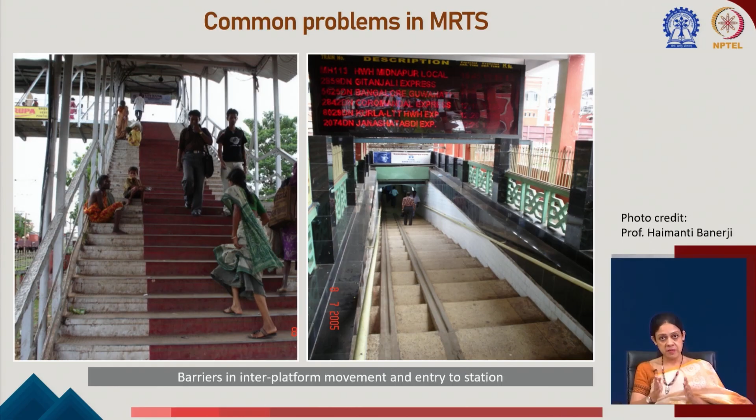These overbridges, foot overbridges and subways are the age-old solutions to the problem of transfer from road to station or from one platform to another, but they are barriers for persons with disabilities and the elderly. So this is one problem. What else?

Next, when you have reached the platform, there is the gap between the platform and the train. There is a vertical gap and a horizontal gap. Unfortunately, our trains are not standard, our coaches are not standard. So even if someone says they will increase the height of the platform, what do you do about the horizontal gap?

Thankfully, when you go for the metros, that problem is less, because everything is standardized there. But our trains are not standardized - our local trains and long distance trains have different dimensions. So the problem is everywhere, it is really a complex problem. Just as our buses are not standard and our bus stops are not standard, similarly our railway stations and trains are also not standardized. That's really a problem, the gap between the train and the platform.

And of course there are facilities like inaccessible toilets. Here it is probably easier to handle, because now we have building design standards and harmonized guidelines, and you can modify them provided there is space. Only the awareness needs to be there. Inaccessible drinking water - these can be handled, but let us first understand the problems.

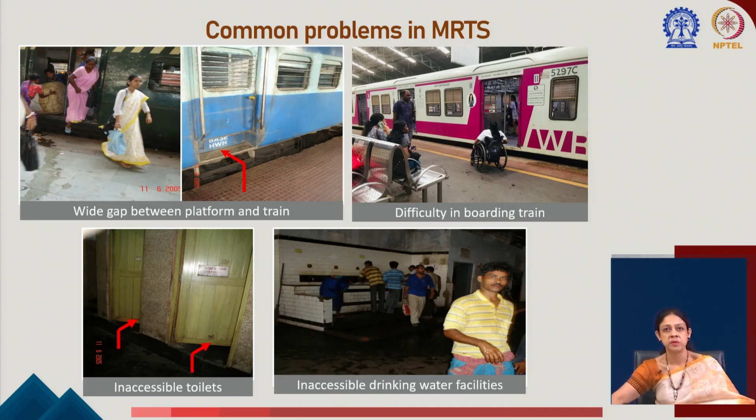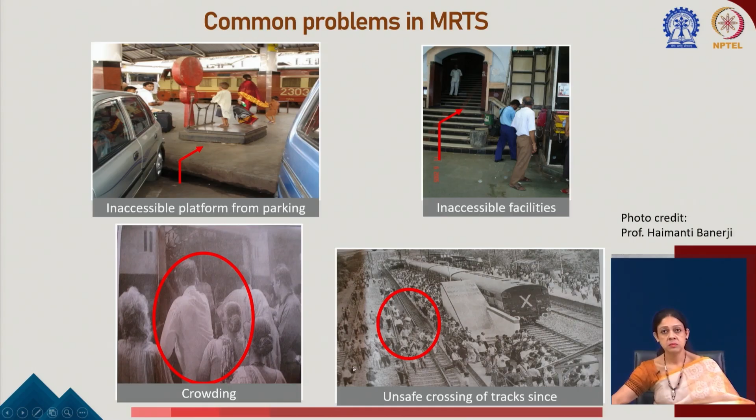Other problems include psychological problems like crowding, unsafe crossing of tracks, and long underpasses for inter-platform movement or for modal changes.

We were talking about modal changes. Generally, when you are transferring from a bus or taxi to the station, many times you need to move through these underpasses, and these are most of the time long stretches without any intermediate seating facilities and with inadequate illumination. So even though there are no level differences, the barriers are still there. These need to be understood.

Inadequate seating facility, crowding is always there in the platform everywhere, and inadequate information in various zones. Someone sitting or waiting in the platform doesn't know when the trains will be announced, and that creates tension.

We talked about psychological barriers in our initial classes. So these are psychological barriers - you do not know where your train will be, whether on this platform or whether you have to walk another 10 minutes to reach it. That creates panic, and because of this uncertainty, people tend to avoid the public transportation system. These are psychological barriers.

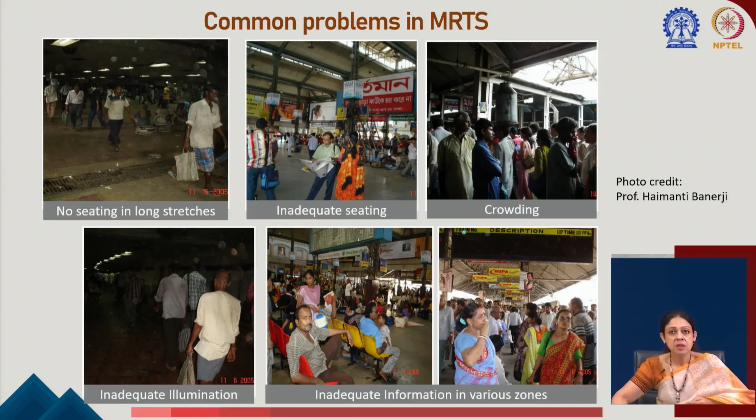So what we need to do - the key elements of architectural vision in the station - we need to maximize passenger convenience by giving them seating and illumination, which would lead to safety and security, because these long underpasses, particularly in odd hours, might be unsafe, and vulnerable people are often easy prey to criminal activities. At the same time, we need fast and efficient passenger flow, flexible interiors with proper seating facilities and vision, and of course a world class icon.

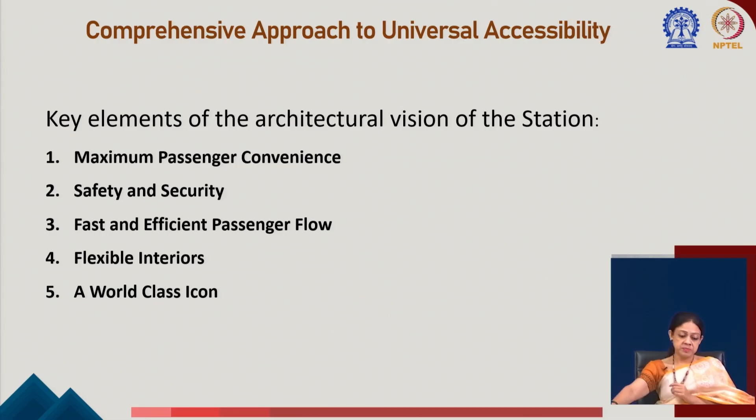So, the design principles, I think, are coming from what we discussed. I will just skip this slide and move on.

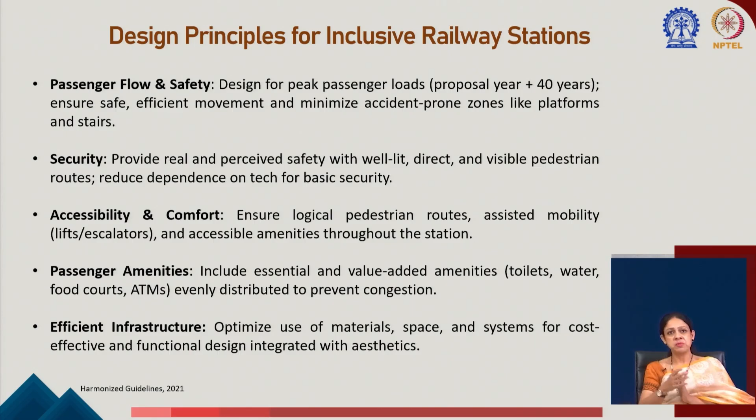Now let us see what components we have. First, when we access the station, that is the parking and vehicular access. There has to be at least one accessible entrance at every intermodal street and access point. We discussed making a facility universally accessible, barrier free and visitable, so this is talking about visitability, that it is at least visitable by everyone. One accessible entry must be there with proper information indicating which is the accessible entry.

And say when there is a transfer from a bus stop to the station, you should be able to know that exit number 5 leads through the accessible entry to the station. No confusion.

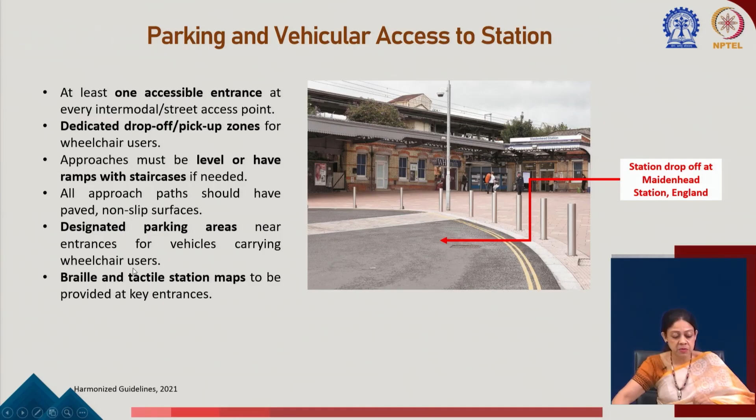Next is the approach route for stations. Definitely level difference is the basic requirement, but other than that, non-slip surface. When we were talking about where the gap lies, we said that sometimes faulty choice of material or inappropriate material procured leads to total failure of a good design. So the surface needs to be non-slip with proper material procured. TGSI, needless to say, and proper width with level ramps. A good example is ramped access to the platforms with TGSI.

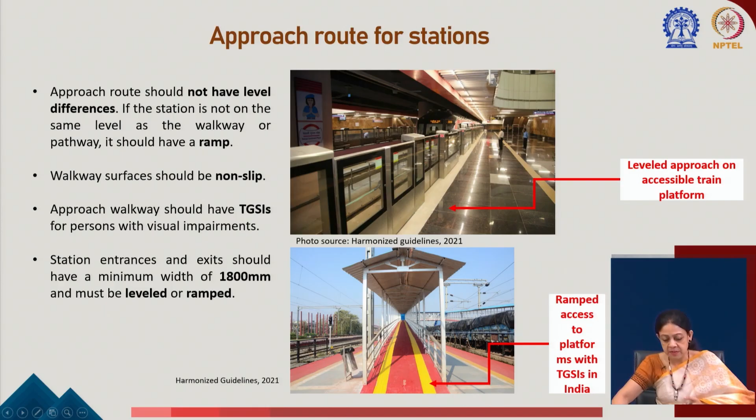Elevators and escalators. At least one accessible elevator with guiding blocks, proper grab bars, tactile braille floor indicators. So every component of an elevator should be there.

Now escalators, as I said earlier, though they are not universally accessible, are useful for mass movement. Escalators are important for semi-mobile persons, like a person with maybe heart disease who cannot take steps but can easily get into the escalator and secure themselves, or a person with heavy luggage, or someone simply tired at the end of the day, can use escalators. So escalators are important for mass movement in public transportation, though they cannot be the only solution. I repeat, they cannot be the only solution. There has to be a proper elevator also complying with the basic accessibility standards.

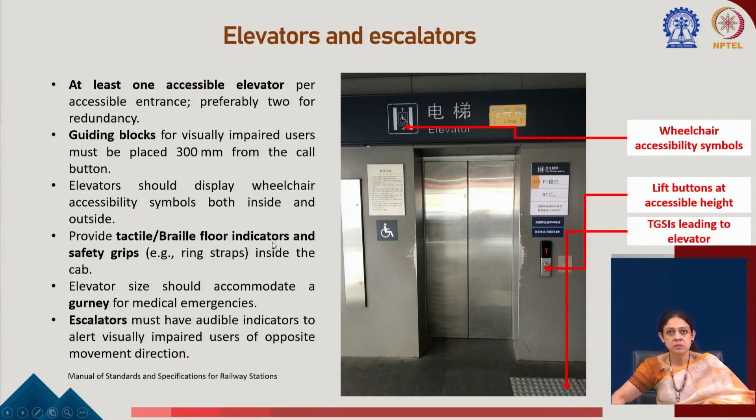Now, once you get into the station, or before you get into the station, you need to purchase tickets. As we discussed for hotel receptions, you need a low height counter. Similarly here, there has to be at least one low height counter with proper knee clearance, because you might need to go in front and access the table and fill in a form.

And also pictographic service maps for easy understanding of important signage. Induction loop unit for hearing impaired users at one counter has to be mandatorily installed there.

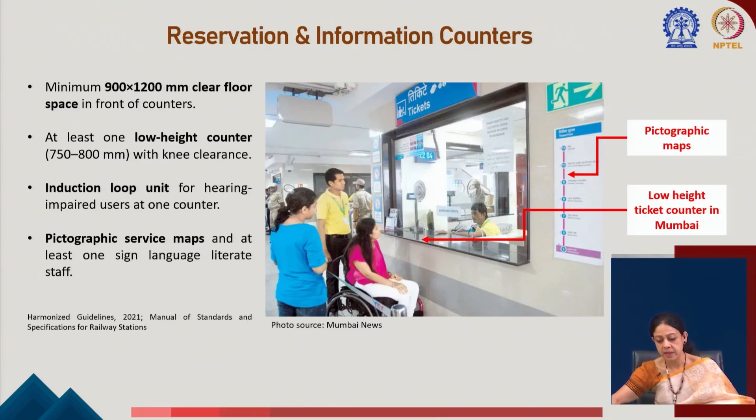So these all reference the harmonized guideline again. As you can see, the pictographic map and the low height counter. This is an ideal design of the reservation and information counters, where you have tactile warning tiles, Divyang friendly booths, and you can see the heights and clear space. So everything is being displayed here. I hope this is clear.

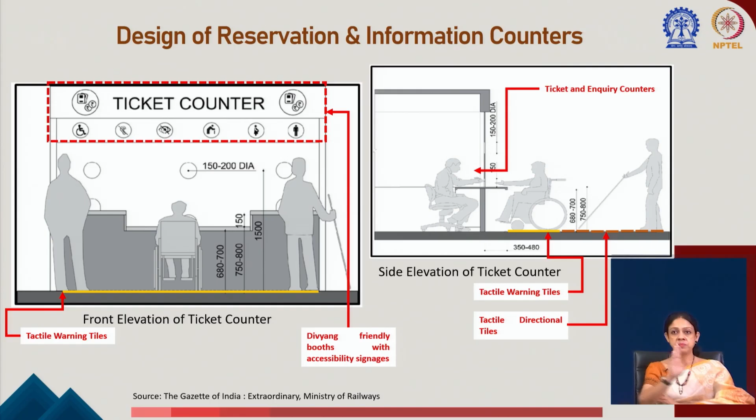Now facilities, for wheelchair and other assistive devices like crutches. That means if someone is not coming on a wheelchair but requires a transfer from the car to the platform or vehicle, a folded wheelchair or space to store wheelchairs, and if required, wheelchairs are to be provided at every station for helping them. First aid kits and other things, and of course the directional tile and the hazardous or stop tiles, warning tiles.

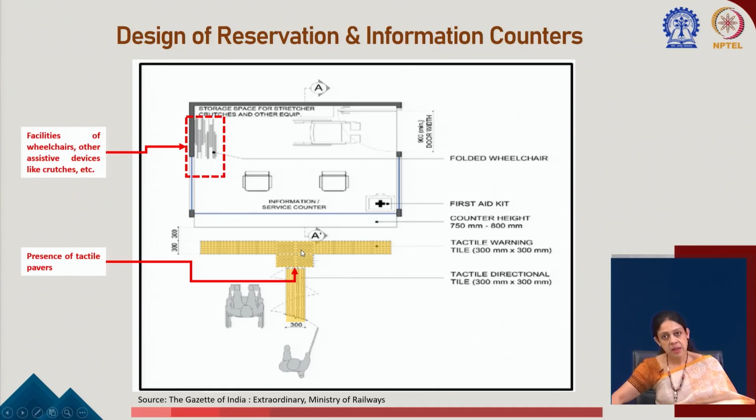Now these are some basic elements which you will find everywhere in every building. Here we see warning blocks at 600 millimeter before the track edge, non-slip level flooring, proper illumination of the platform, no gap or direct transfer, and accessible connection between the platform via lifts and all.

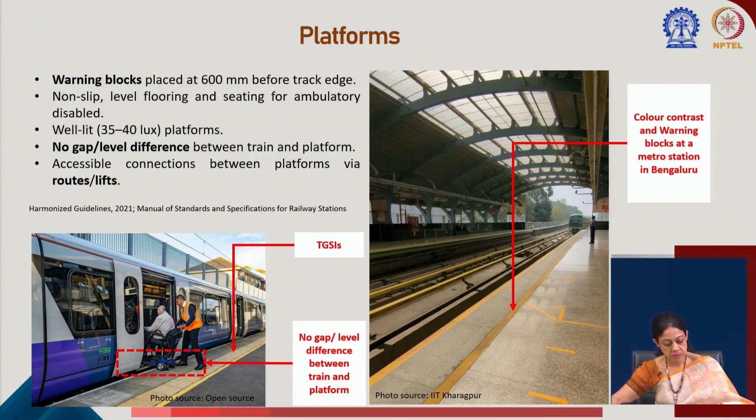Now this is important. All structural elements like columns or coach position indicator poles, etc., shall be painted in contrast color from the bottom to 900 millimeter. Why? Because these are for people with low vision or advanced cataract, or for elderly who might be unmindful. So this is a safety measure which prevents people from unmindfully hitting them.

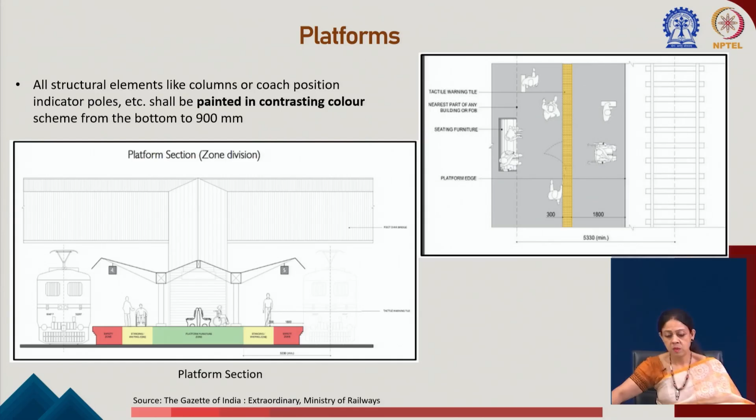Now, coming to the inside, that is the coach design and sitting facilities. First of all, entry wide doors with proper gap. If required, hydraulic lift or ramp at one door if there is a huge mismatch exist. Now, within the coach, a well demarcated wheelchair space.

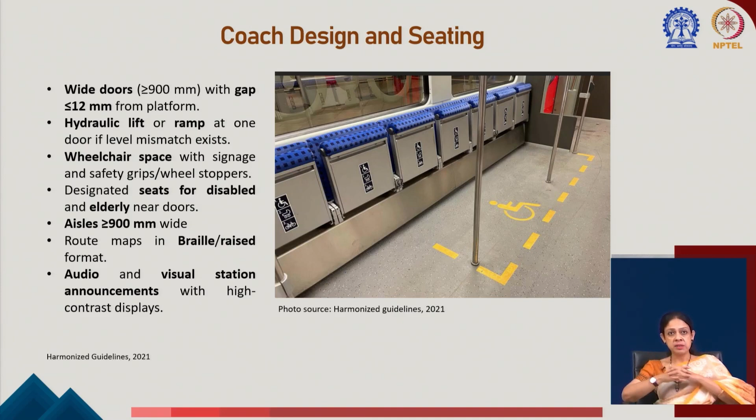Designated seats for disabled, proper aisle width, the route maps in braille or raised format. So, these are essential for the design of the coaches inside.

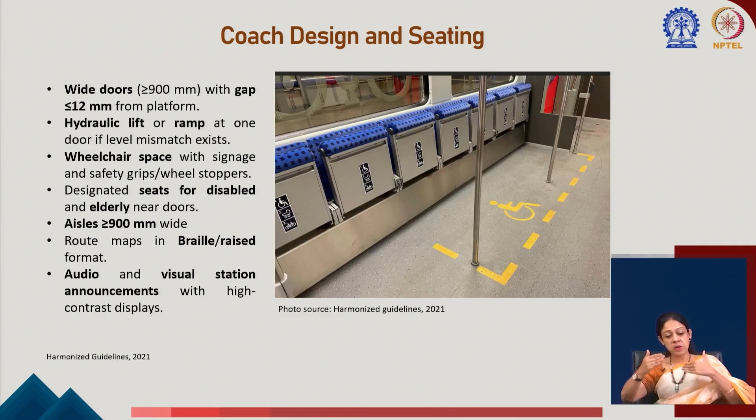Now, what are the facilities at the station? Toilets are there definitely, and a toilet will follow the normal accessibility standards, like wheelchair turning radius, grab bars and all. The drinking water points, their height, the signage in braille and pictogram, and also please see the last point, toilets and kiosks should be located near the accessible routes and platforms.

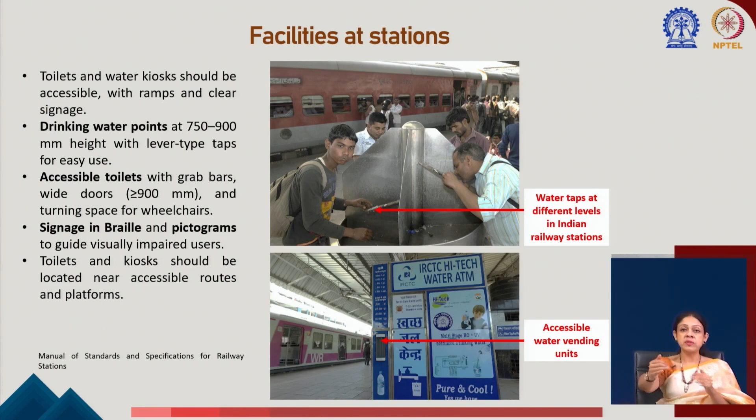Now, if it is not possible for a designer to have the entire station accessible, we have discussed while talking about buildings also, that it might not be possible to make the entire building accessible, but we must define that this route is accessible, and every facility on that accessible route needs to be accessible. So, of the various entry points to the station, one entry is accessible with proper marking, and that entry should lead to an accessible route to all the platforms, and all the facilities on that accessible route must be accessible.

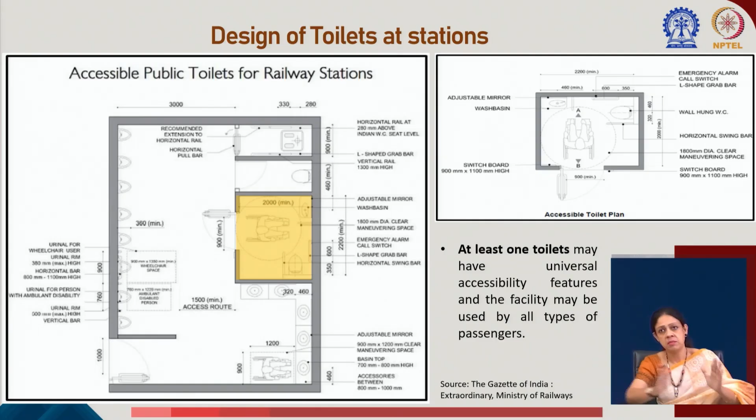So, this is the simple toilet design. Ideally, there should be one accessible cubicle within every group of toilets. Inside the toilet, it is similar to what we have done for the building level. Just copy paste it here. This is same.

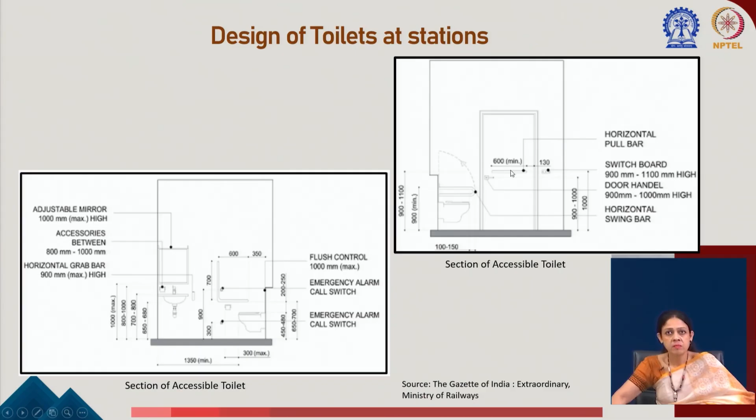Design of drinking water points. This is important because it is a facility which is being used quite frequently, particularly in our Indian railway stations. So, the height of the taps is important, and clear knee space below the taps is important.

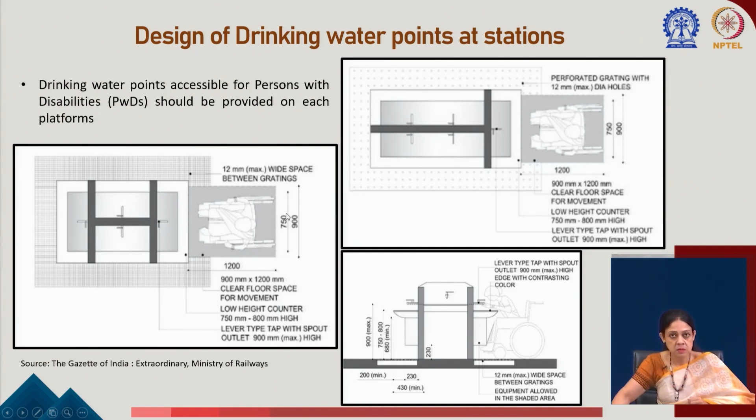Yes, signage. Now, this is very challenging. Why? Because you have to place the signage so that it is visible to the maximum number of people, and from a large distance. It is very easy to design a signage system for smaller buildings, particularly when you talk about the braille signage. You need to access it, to touch it, to feel it and understand. But that might really be a challenge when you have such a huge hall.

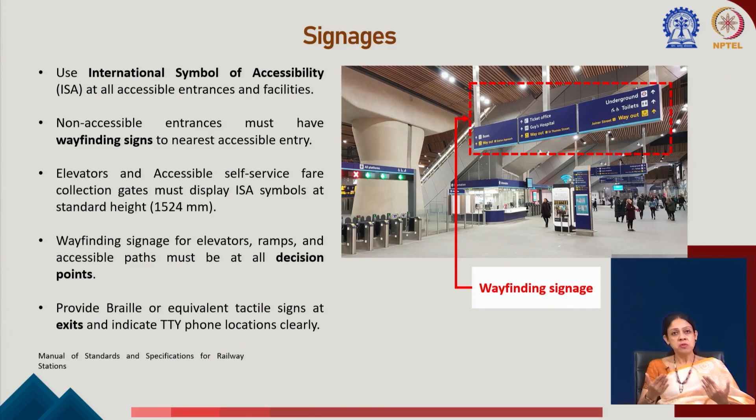So, you have to find out the ways and means of where to place a braille map or braille signage so it can easily be accessed by people, and you have to lead the person to that particular point so that they know where the braille signage is. Otherwise, follow the general international symbol of accessibility in terms of color contrast, font heights, font choice, background foreground contrast. So, these all are to be followed here.

So, what is important here, which I have highlighted, is that at every decision point there should be some kind of information being given. Nobody should be stopped at any point. Wayfinding becomes otherwise very difficult.

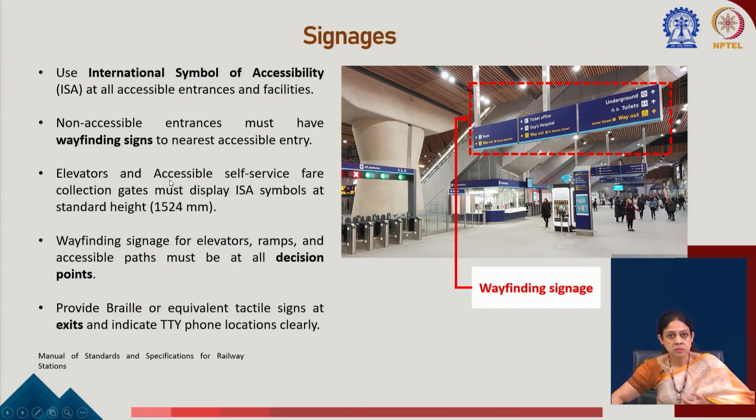So, now these are the standard pictograms which we are generally following, that are Divyang friendly. That means maybe you have 10 toilets in a station, but maybe 2 of them are Divyang friendly. So, it should have this symbol. It should have this Divyang friendly symbol, water booth should have this symbol.

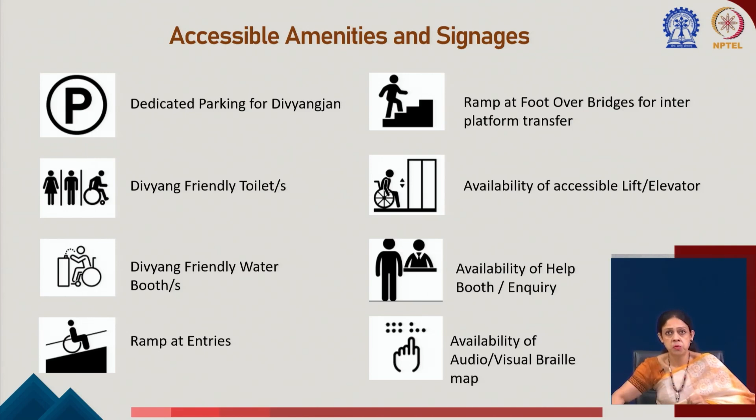Dedicated parking where you have ramps at foot over bridge for inter-platform transfer, and whatever you are having, availability of the help booth or inquiry, availability of the audiovisual braille map. So, there has to be a proper symbol through pictograms. Let us see some international good practices.

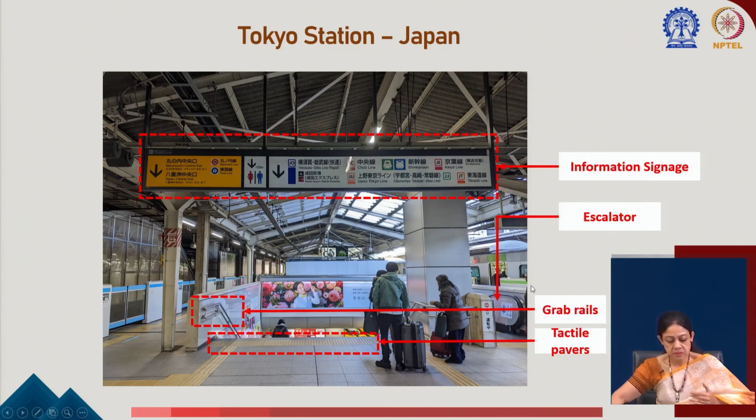So there you can also have the possibility of some provision for a person with sensory disability. So just before the escalator, proper information, grab rails, tactile pavers, step free entrance, audible and visual alerts for train arrivals.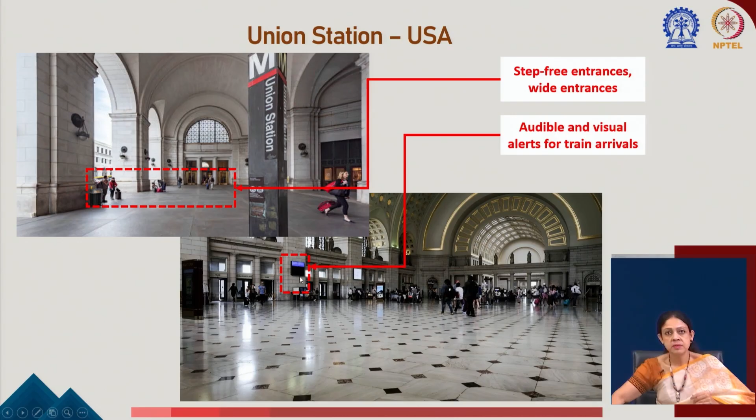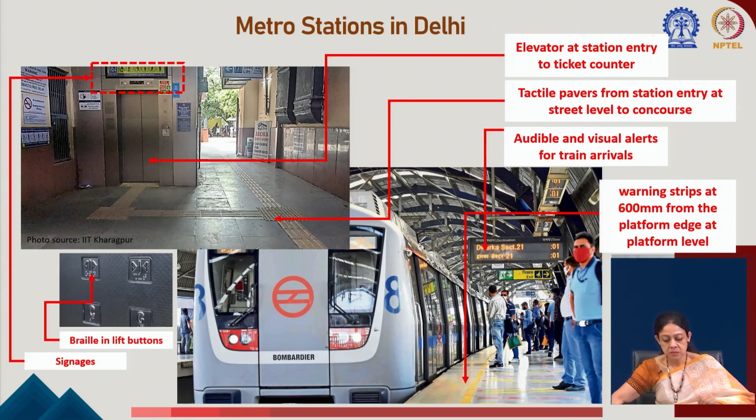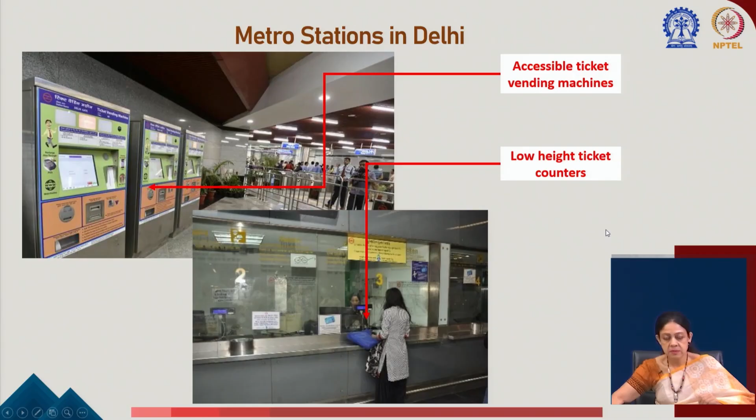Accessible ticket vending machine, low height ticket counters, signage, audiovisual train announcement, color contrast and level platform. These are similar, just to show you different context.

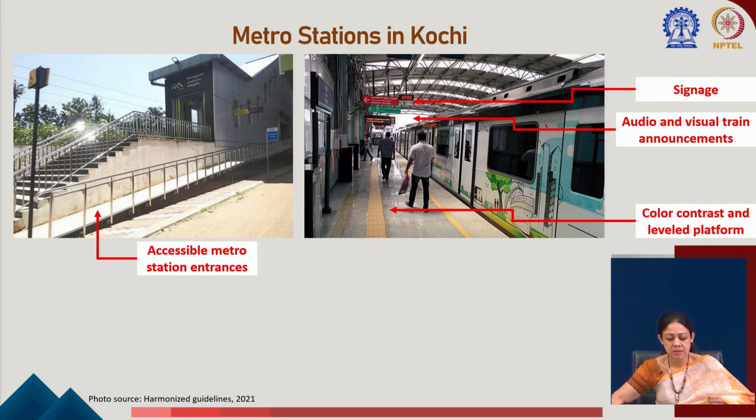Yes, when we talk about vulnerability, in our initial classes we said that sometimes women face problems because of the threat to safety and discomfort. So sometimes these women-only coaches in metros are acceptable and appreciated by women.

Just on a lighter note, to discuss with you some local and indigenous solutions. Maybe when you cannot have, at a small railway station, something like an elevator, you cannot afford it due to cost constraints or something like that.

Maybe there can be a paved pathway with a centrally controlled gate, preventing access at other times, from where you can take a wheelchair, take your luggage, and people can walk at ease.

So just a solution, because if you go back to UDIP, Universal Design India Principles, where we talked about the 5S, one of them was sasta, or affordable, economy. So we have to have innovative, indigenous, locally developed solutions for every scenario, which is important.

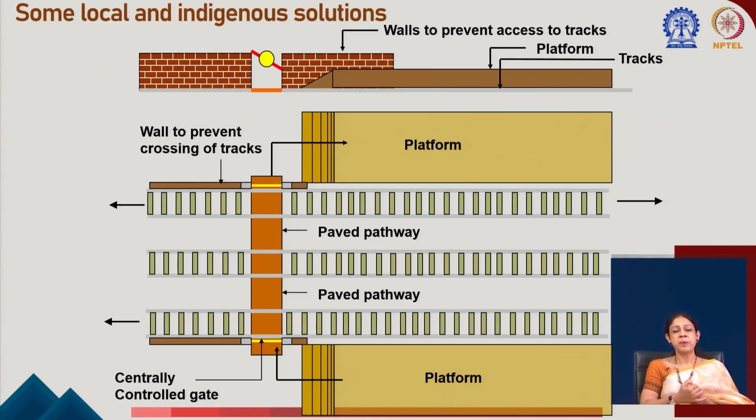So this may be a solution for inter-platform changes. It is a very common sight in Indian stations that people prefer to wait on the foot overbridge.

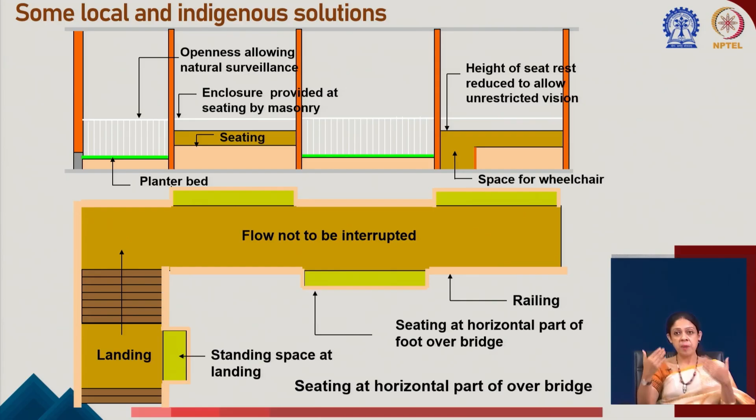Why? Because once they go up and the train is announced, they can easily get down at the required platform. It is not that this is to be really encouraged for everyone, to reduce the load on the overbridge that is not desirable, but at least we can have some priority seating on the horizontal part of the foot overbridge. Not for all, but only for people in the vulnerable group, in case they need to move from one end of the overbridge to the other, because if an overbridge runs over 8 platforms, someone might need an intermediate break.

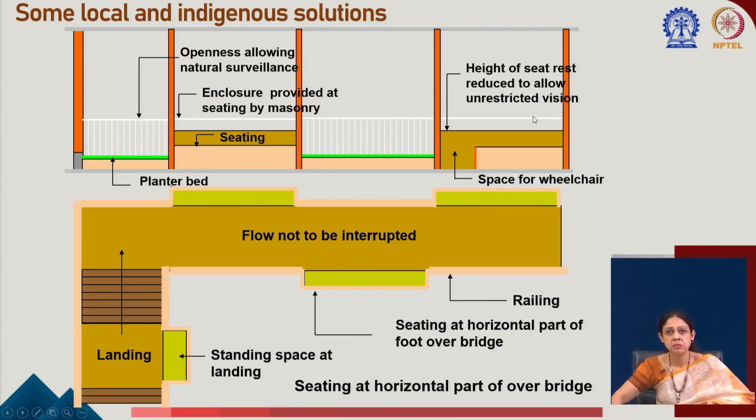So this is most of the time overlooked. Limited seating facilities on the overbridge are also essential, on the horizontal part, without interfering with the flow.

Maybe we talk about panicking. That's a very common situation in railway stations, that your train is announced and you move from platform number 1 to platform number 15. Suddenly there is a change in platform. As we have seen when you cross the road, the signal shows how much time you get to cross.

So here also, if we have a countdown showing the exact time of departure, and how many minutes you have to move from one platform to another, that will reduce the panic, reduce the psychological anxiety which often leads to accidents, hurrying, and stampede due to crowding.

So these are some simple solutions. With the help of some low height barriers or even notional barriers, we can cordon off an area and create subzones within a big multipurpose space, where people can wait, not cut off from the rest, but at least have some kind of barrier that gives a sense of security and comfort.

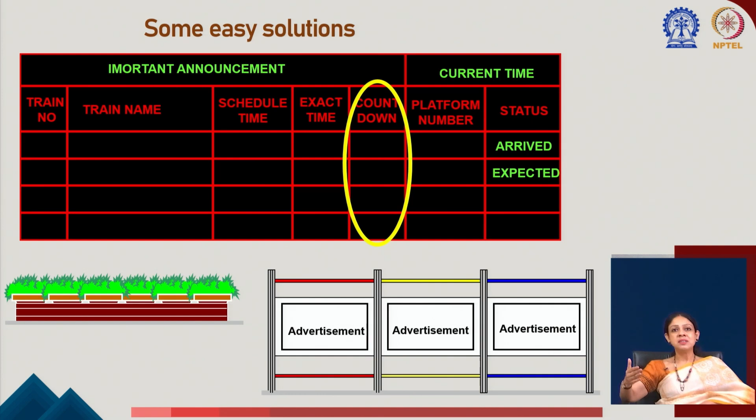So some really doable, easy solutions. These are not really as per any standard, but are being developed at IIT as part of our research, and I thought I would take the advantage of this platform to share these with you.